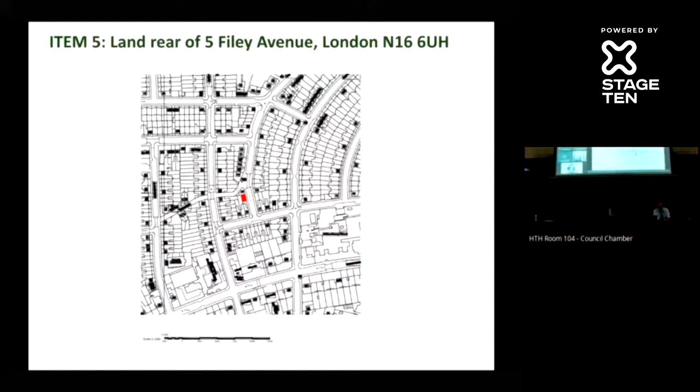The site is due north of Filey Avenue, which has been annexed from Filey Avenue. Filey Avenue is a two-story end of terrace property, which has a three-story rear addition and a single-story rear extension. The property is in use as flats. To the north is a two-story residential building, 1 Old Hill Street. And to the east, 3 Filey Avenue, which has a single-story rear extension and a sycamore tree in the rear garden facing the site.

In terms of the principle and land use, the principle increase in housing stock is considered acceptable, given that the site is located in a predominantly residential area. The principle of annexing rear gardens to provide new residential units is supported by the Conservation, Urban Design and Sustainability team, as there are similar developments which have been granted planning permission, of which there is no impact on the street scene or conservation area, and no impact on neighbours that are considered substantial and harmful.

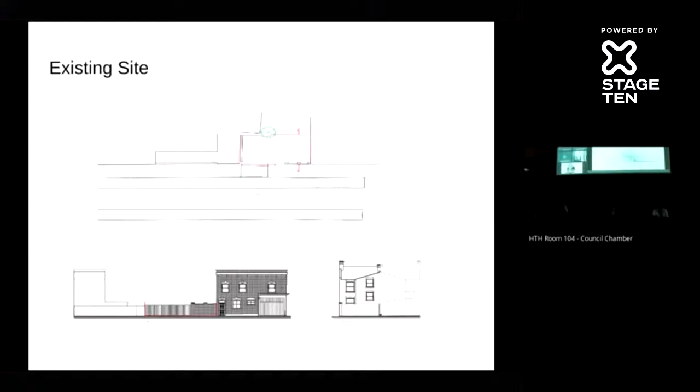In terms of the proposal, the proposed development seeks to erect a two-story, including basement, building on a strip of land adjacent to the rear of Filey Avenue in order to provide a one-bedroom self-contained residential unit. The development will occupy the full width of the site and have a flat roof with a height of 3 meters from ground level. A light well will be provided at basement level in order to provide natural light to the basement living spaces. In terms of materials, the development will be built from London stock brick with a Flemish bond, aluminium frame windows and aluminium door.

In terms of the design, the development incorporates an attractive modern design which incorporates a mix of use of bricks, such as embossed yellow London stock and yellow stock perforated Flemish bond. This has been improved since the previous design incorporated window panels and louvers. The proposal also includes no rear openings, but light and outlook is served via an internal courtyard and 2 front windows and roof lights. The basement would have a light well which provides sufficient light to the bedroom.

The overall height and bulk of the new structure is subordinate to both the host building and the adjoining building, 1 Old Hill Street, and given its single story above ground appearance, the proposal will still maintain an open character and retain views to rear gardens, which are important features of the conservation area.

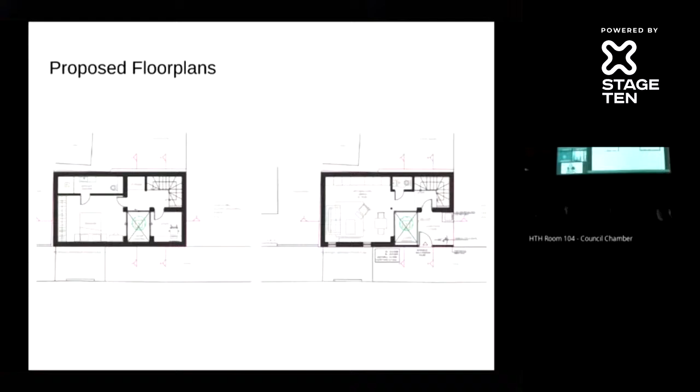In terms of sustainability measures to reduce carbon emissions, solar panels are proposed at roof level.

Don't have the roof? Yeah, it's on there, should be there. Just carry on, Michael. Yeah, solar panels are proposed on the roof level.

No other measures will be introduced to reduce carbon. Therefore, the development will require a £1,000 carbon offset contribution as per the requirements in the 2020 Planning Obligation SPD, by way of legal agreement.

In terms of biodiversity, there is a green roof proposed, but the green roof is a sedum mat, which is not acceptable. So therefore, we have conditioned it to provide between an 80 to 150 millimeter substrate depth green roof. Due to the site constraints, no further biodiversity can be provided.

In terms of flood risk, the site is not in a critical drainage area, but it is at high risk of surface water flooding. As the proposal involves creating habitable rooms within the basement, it's essential that the development is protected against flooding. So therefore, a flood risk assessment will be required, and this is secured by condition.

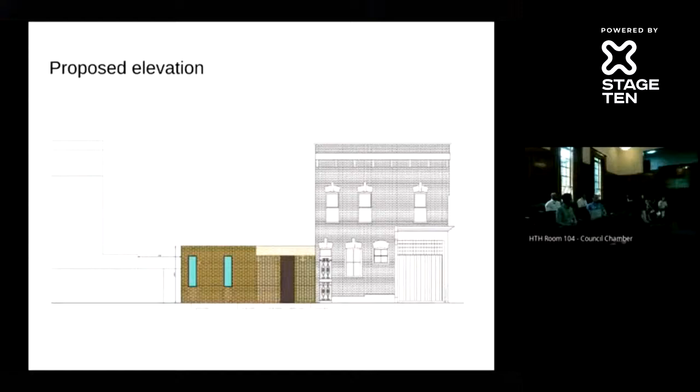In terms of refuse, this will be located within the courtyard and enclosed in timber slats. Sufficient refuse provision has been made, and there are no objections on waste management.

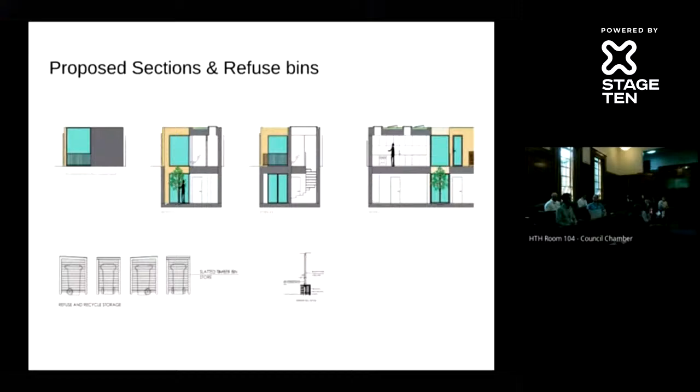In terms of amenity, there are three properties to consider: number 1 Old Hill Street, number 3 Filey Avenue, and number 5 Filey Avenue. Number 1 Old Hill Street is a 2-story building, much taller than the proposed building, and it has no windows on the flank elevation. So therefore, there will be no amenity impact to this property.

In terms of number 3 Filey Avenue, this property has a single-story rear extension with patio glazed doors, as you can see on the photos, and has substantial glazing. There are also 2 further side windows facing number 1 Filey Avenue. Given its wide open views from the rear windows and the additional double aspect windows, it's not considered there will be a loss of light or overbearing from the new building.

In terms of number 5 Filey Avenue, this property has a single-story rear extension with glazed patio doors, as you can see on the photos, and a side window, which will receive adequate light. There is sufficient distance from the rear extension to the new building, which is 3 meters, as opposed to 2.5 meters which was a drawing that was incorrectly drawn, and this has been amended.

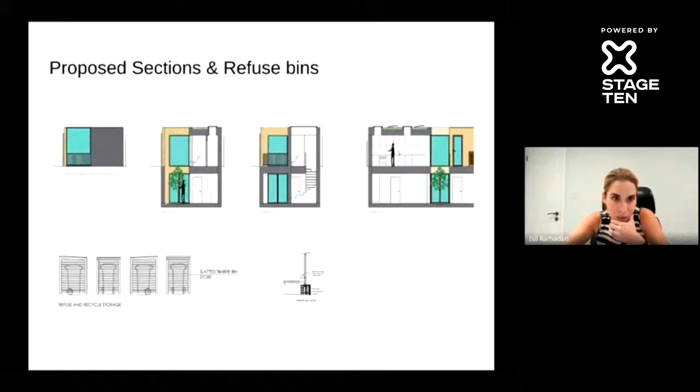Just tell us, we don't need to see any drawings or anything. Yeah, that's fine, I can just get you roughly. Sorry, so I've got to give you accurate information. So you're looking at, just square meterage wise, roughly, about 25 square meters of green space roughly. Okay, thank you, 25 square meters, okay.

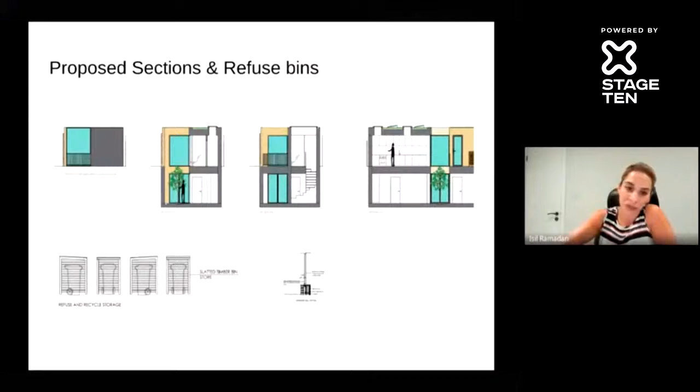Okay, thank you. One more totally separate issue. There's been a lot of talk about whether this land is part of, in effect, the back garden of another property, whether it's owned by someone else or not. Would it make any difference in planning terms if it was part of the back garden of another property?

Yes, it would, because if we found evidence that the site did not belong to the owner, then we would probably have to withdraw the application.

It's a separate point I'm making, it's not about who owns it. Does it make any difference to whether it's a good or a bad idea to build this building on this bit of land, whether it's already part of someone else's back garden or whether it's separated off?

Hi, Councillor. It's a different form of assessment. We would consider the loss of amenity space if it was part and parcel of the main dwelling house. We need to consider each case on a site-by-site basis, and in this instance, the land in question does not form part of the garden. So we've assessed it on the basis of what's set out in the report.

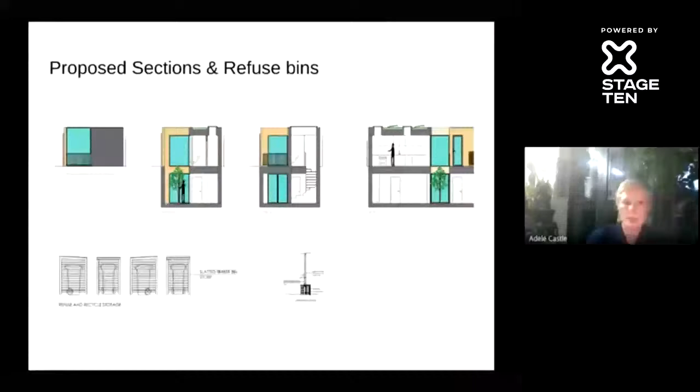Thank you very much, Adele. Any final questions from the committee? Is everyone clear on all the questions, all the issues? Someone made a judgment? Yep.

Yep, okay, in that case we'll move to the vote. The recommendation is that planning permission be granted, subject to the conditions that are set out. All those in favour, raise your hands. Thank you. Those against? One, thank you. And those abstentions? Great, thank you very much. In that case, that passes.

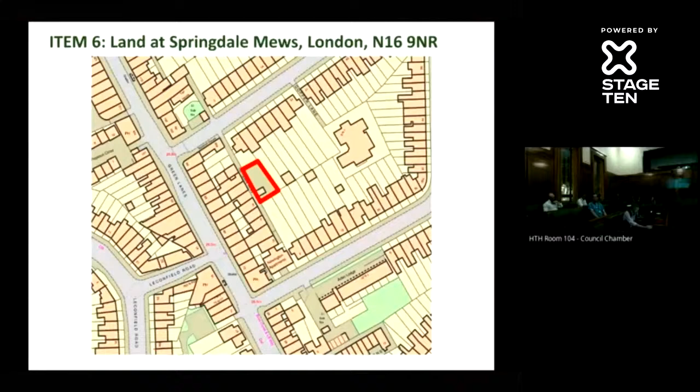Before I proceed any further, I'd like to draw members' attention to the fact that the principle of the development is not under consideration, that has already been agreed by the members. In terms of the highway, Springdale Mews itself is a private road over which the local planning authority and the local highway authority have no control. There has been a scheme for improvements to the highway, which has come before the members of the planning subcommittee and which has been approved, linked to the substantial development by way of a legal agreement.

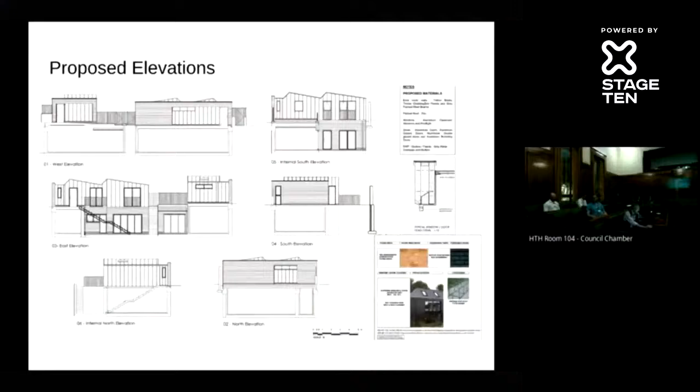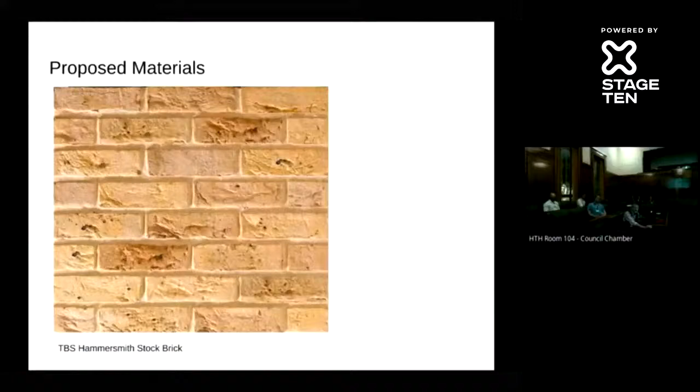Now, these are the proposed elevations of the building. They've also submitted details of window reveals and doors, and the proposed external materials are a mix of 2 different types of brick. There's a Hammersmith stock brick, illustrated on the screen, very close to the traditional London stock brick, which came from the clay around the Kingsland area with quite a high chalk content. The other brick is a Staffordshire blue engineering brick, a much harder brick, manufactured by Ibstock, providing a suitable contrast with the Hammersmith stock.

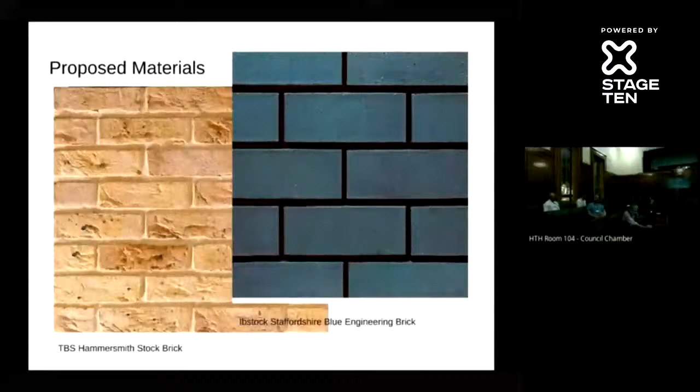In terms of the roof, it's going to be standing seam zinc by VMZinc, and the colour would be 7016, which is anthracite, that very dark coal-coloured structure. The windows and doors would be powder coated aluminium, again also in the anthracite colour.

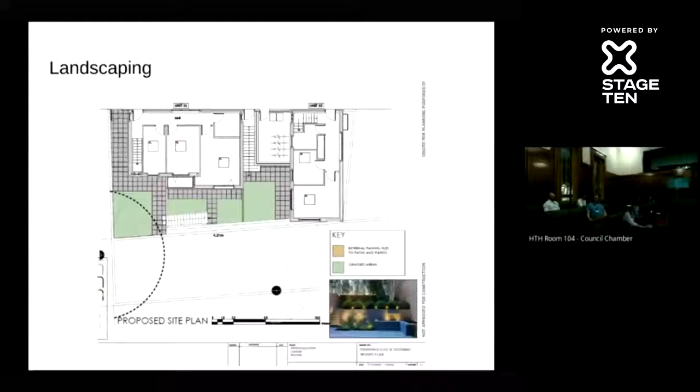In terms of landscaping, there is some permeable paving that would be down at the lower ground floor level, because it's a 2-storey building, 1 storey above ground and 1 storey below ground, with some grassed areas. This is almost quite a light touch landscaping scheme, because it's in a lower ground floor area. It wouldn't be visible from the public domain, and it's not really the role of the planning process to dictate how people lay out their gardens and what plants to plant in them.

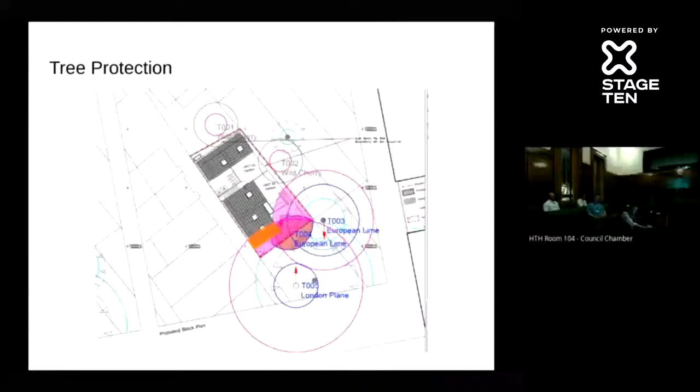Now, this is the tree protection plan, but I would draw members' attention to the addendum. This element of the proposal has now been omitted from the application before the committee, and there are negotiations ongoing to ensure that a tree subject to a TPO would be replaced. In terms of construction management, there'd be no parking either on site or near the site for operatives, and as I pointed out earlier, Springdale Mews is a private road.

And there is an area shown on the site for the storage of building materials, and also another area for the welfare facilities, like the site hut and the tea and coffee making facilities. The construction management and logistics plan has been reviewed by the council's highway engineers, and from a network management point of view, there are no concerns.

I do know that there have been significant representations regarding the provision of access to residential properties located on the west of the development site. I would point out that these also share this unadopted private roadway, and that those buildings were originally constructed as commercial premises at the rear of properties fronting Green Lanes, and any residential unit uses have not been the subject of express grants of planning permission, but have accrued immunity through the passage of time.

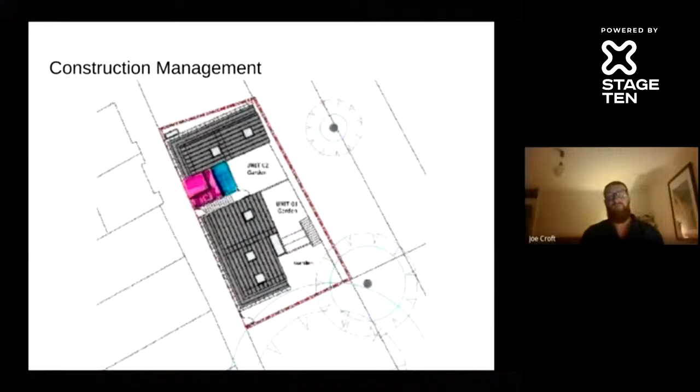Thank you. So I'm going to make a suggestion. I think it's better that we don't read this construction management plan during the committee. We also don't have the applicant here to answer any questions, so we're just going on officer time. I suggest that if the committee is in agreement, we should defer this until a future committee meeting, get the applicant here so they can answer questions as they should be, and make sure the detail is in the report itself, not separate on the planning portal. Does that make sense? People can murmur agreement or dissent, or nod. Okay, great. So do we need to take a vote on deferring, or do we need?

Is the question a procedural one as to how we can vote to defer? I think what we've done at previous meetings that we seem content with is that one of you will propose a new motion, or it will be seconded, that we defer this item until the next meeting so additional information can be provided, and we won't vote on the recommendation.

Thank you. Gerard, do you have something you want to say? No, I have nothing to add. Okay, we don't have a time constraint. There's not something that this needs to be decided. This is not the last.

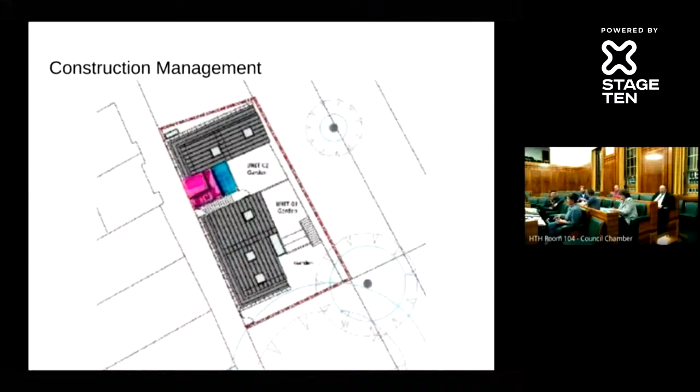Okay, we have agenda item 7, the final substantive one. Gerard is leading on this as well, which is Windus Road and other details.

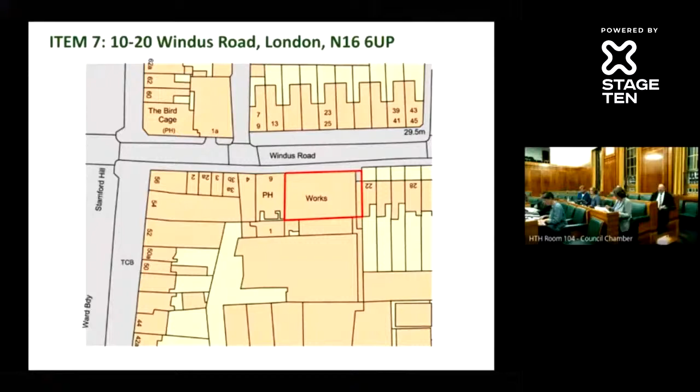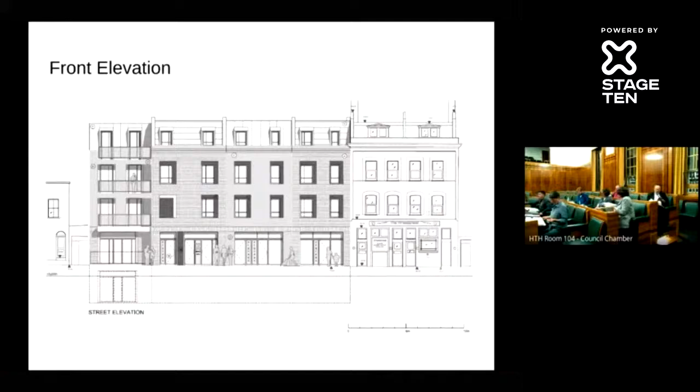This is a site at 10 to 20 Windus Road, on the south side of Windus Road, near the junction with Stamford Hill. It was previously occupied by a single-storey commercial building, and a planning application was approved in 2020 for the redevelopment of the site to provide a single storey of commercial floor space at ground floor with a partial basement, and nine residential units above. When the original planning permission was granted at the planning subcommittee, members requested that details of the external materials be submitted for approval by the members.

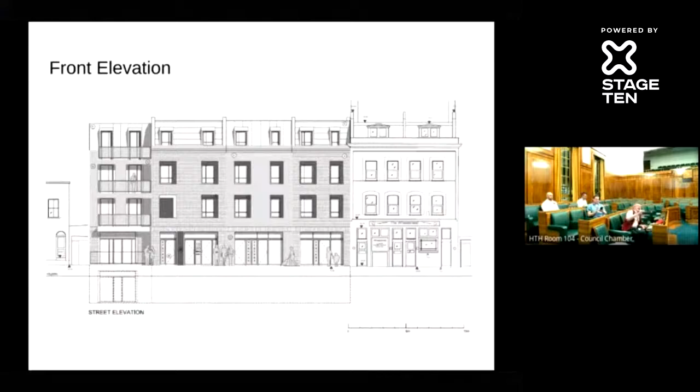I'd like to draw members' attention to the addendum in which we've received revised drawings that reinstate what had been previously approved, the soldier course above the ground floor, even on the parts of the building that are going to be rendered. Going from left to right, you've got brick at ground floor, brick soldier course above, then render brick, with standing seam zinc on the mansards. At the rear elevation, moving left to right, we have render brick, again with standing seam zinc. On the side elevation, this is a rendered side.

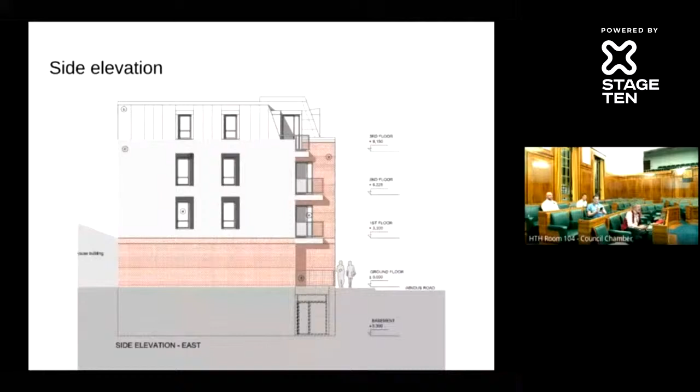In terms of the external materials, these have been reviewed by our specialist conservation and design officers. We did request that the soldier course be reintroduced in accordance with the original approved drawings, and this has been done, and the application is recommended for approval.